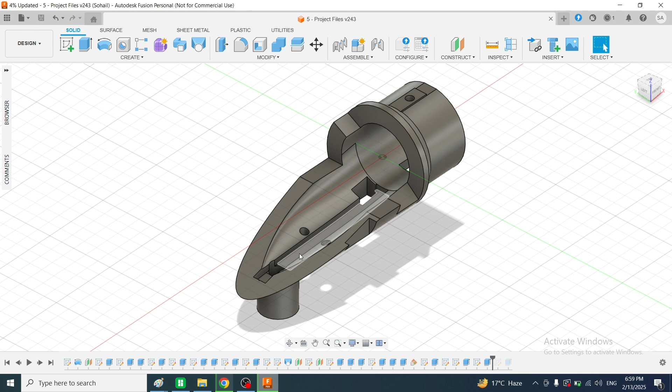Hey guys, today I will explain how we can create this type of deep groove around a surface in Fusion 360. So let's start it.

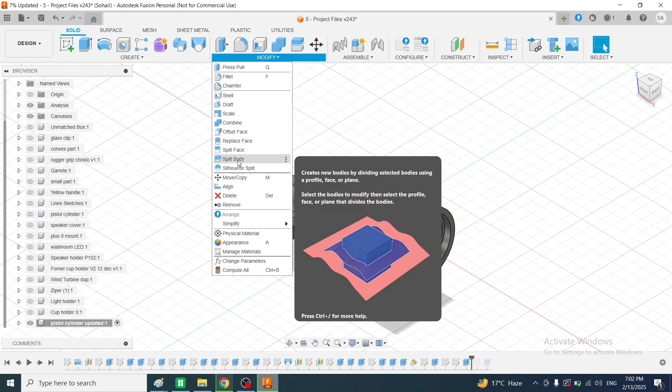Guys, this is a part that I have made in Fusion 360 and now I want to add a groove here. First, I will break this object into two pieces. For breaking this object, first I will go to the isometric view. I will go to the modify tab and click on split body. I will turn on the axis.

First I will select the body and then I will choose the XZ plane. The object will be divided into two equal parts. So I will click on OK. Now you can see here in the bodies folder there are two bodies right now and I can hide and show them. Now I will make a sketch on the XZ plane.

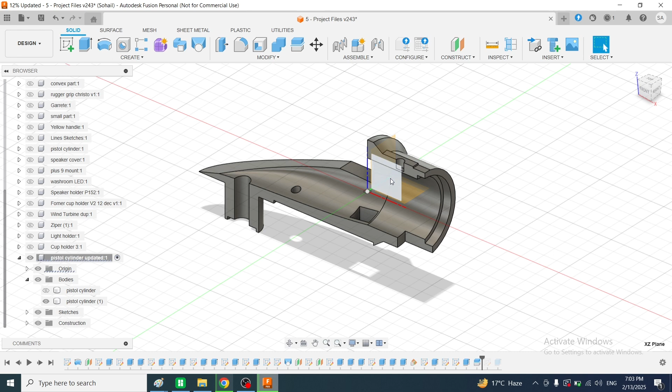First I will select the XZ plane, right click and create sketch. Now I will project this edge. For projecting the edge, I will press P on the keyboard and then select this edge and this edge.

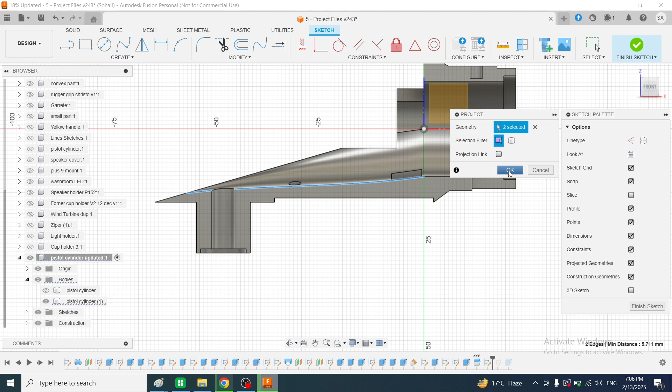After selecting these edges, I will unselect this checkbox because at later stages I will reverse the split body action, and then I will click OK. Now I will take the line tool and connect these two vertices. Now I will make the offset of this edge.

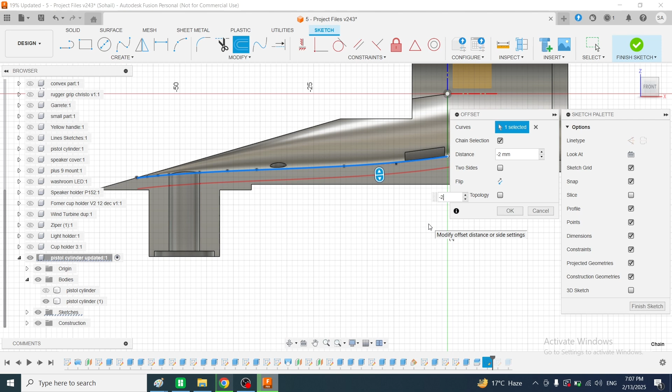For making the offset, I will press O on the keyboard, click on this edge and enter the value -2. This means that this groove will be 2 millimeters deep, but I will keep it 1 millimeter, and I will press OK. Again, I will make another offset. I will enter the value of 5 and click on OK.

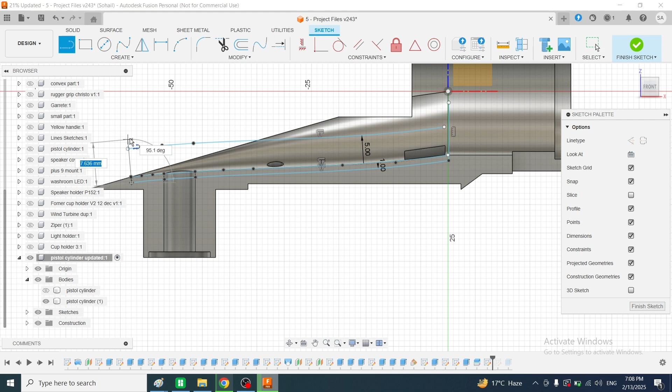Now I will select the line tool and create a line from here to here and another line from here to here. With the help of the trim tool, I will cut off extra lines here and also from here. You can see that this line is not on the y-axis. So again, I will delete this line and create another line which must be on the y-axis.

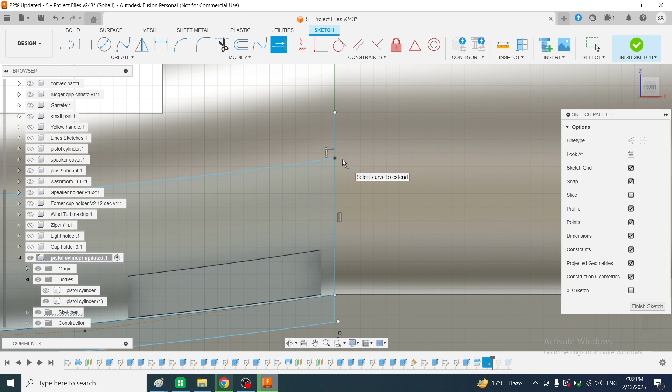Now I will use the extend command and extend this line to the vertical line. Now I will select the trim tool and cut off the extra lines from here and here. Now I will finish the sketch. Now I will go to the isometric view and the basic sketch is completed. Now I will turn off the body.

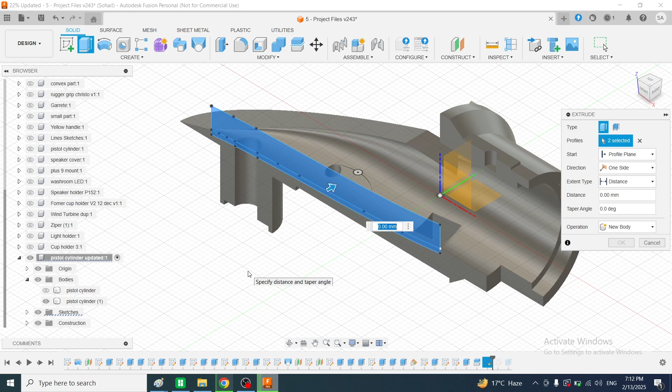I will click on the extrude command and select these two profiles. Then I will turn on the body and apply a cut operation. First I will select symmetric and enter the width of the groove. I need a 3 millimeter wide groove, so I will enter the value 1.5 and click on OK. Now I will turn on the other part. Now you can see that the groove has been added to the bottom.

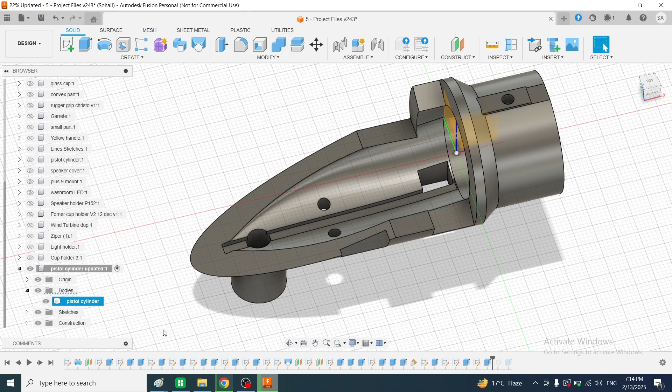Now I will go to the split action on the timeline, select this one and press the delete key on the keyboard to delete this operation. Once this operation is deleted, one piece is also deleted from here and the groove has been added to the body.